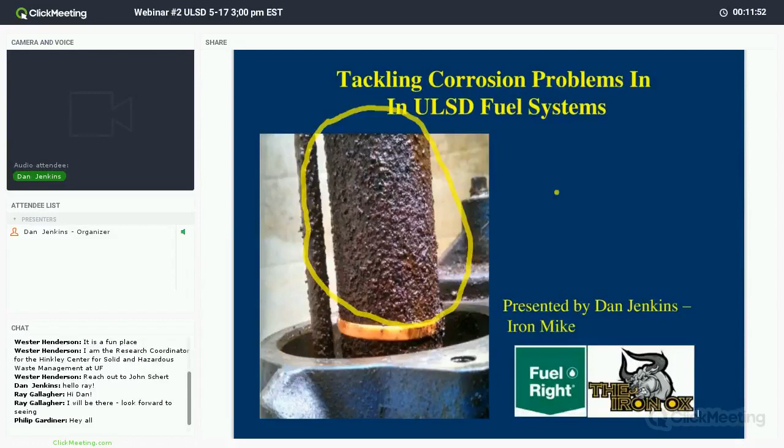My company is Iron Mike Global. We're representatives worldwide for Fuel Right and Iron Ox, and we are focused like a laser beam on solving nasty corrosion problems in hostile environments. In diesel tanks and in sumps, they're some of the nastiest known to man.

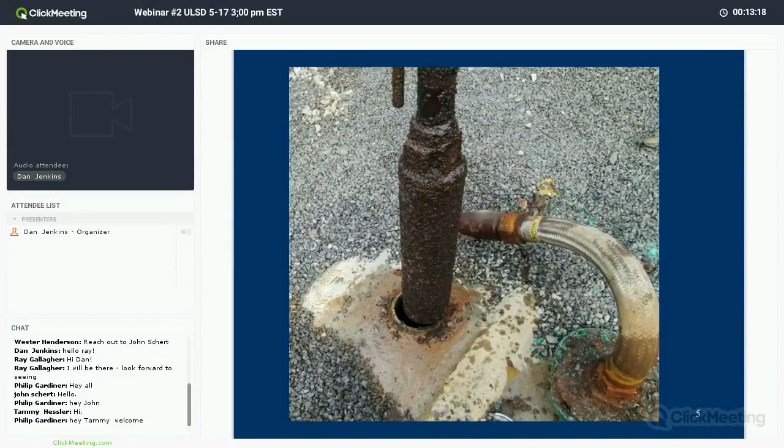There's some other corrosion, some indicators for you guys out there. If you see corrosion on your shear valves, on your piping, if you see this nasty black stuff in any of your filters, that's a sign. Corrosion is sure to be coming.

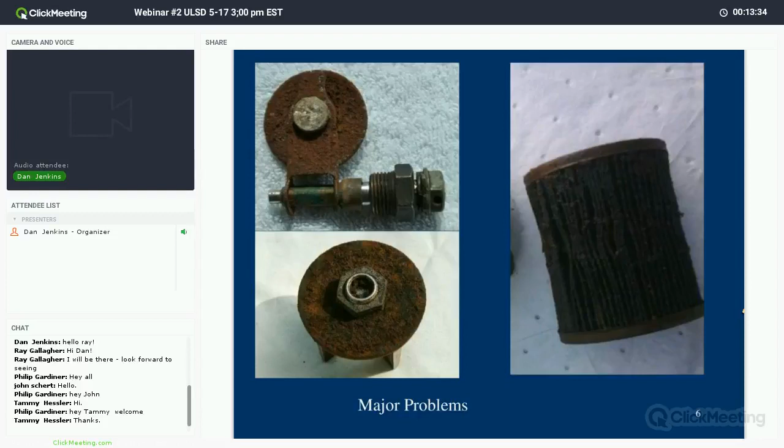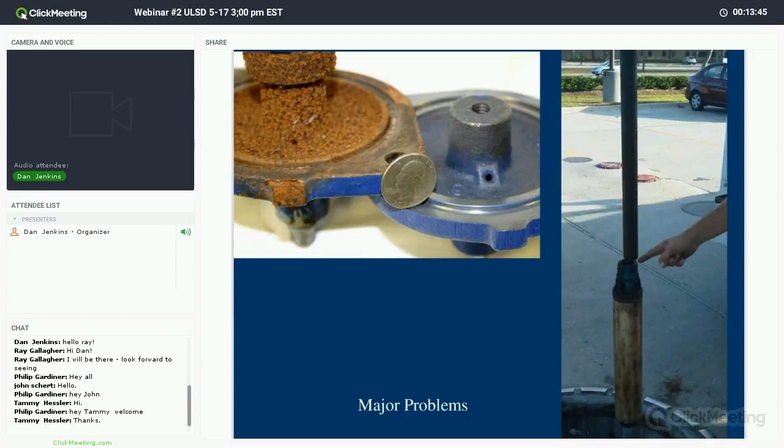Here's some other pictures. This is from Florida, and this is something that failed. It basically broke because of corrosion. We're going to talk a lot about that today, how to prevent premature equipment failure.

Some other signs, most of you don't stick your head in your tank. However, this is the bottom of a fuel tank, and it's got corrosion. You can see it right here.

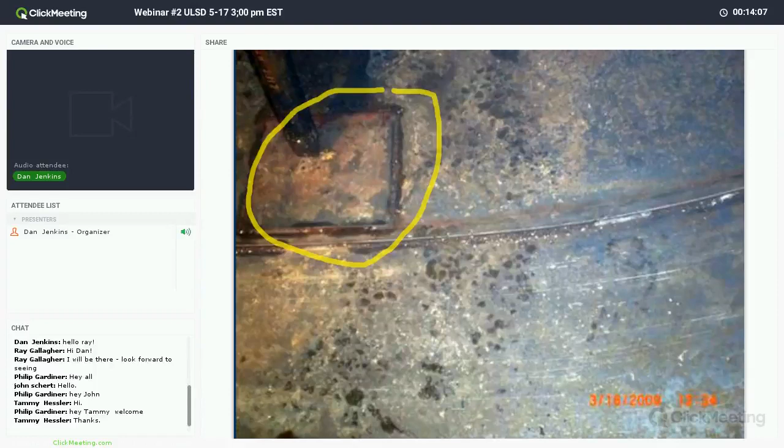Eventually it pits, or the wall thickness gets thinner from the outside or the inside, doesn't really matter. And eventually there's not enough steel there to hold the fuel, and pop, it leaks.

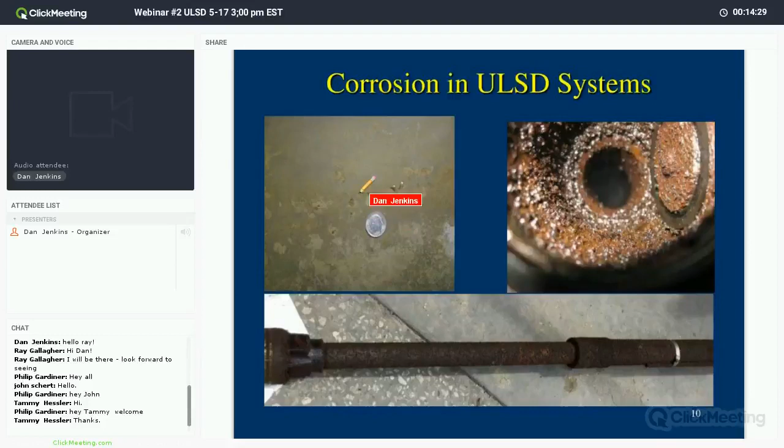We are getting deeper into the fill tubes, the drop tubes, and the spill buckets, and man, they got just as much corrosion as other places. You can see the corrosion. Here's the inside of a tank. See those little pits over there? Small pits turn into big pits, turn into big problems.

Again, the primary frustration for folks out there is, hey, this equipment ain't cheap, and it's supposed to last a long time, and now you got to replace your equipment.

Okay, not good. If you guys have trucks out there, I spent a lot of time at truck stops, and people complain a lot about slow pumps. So if you have slow diesel pumps, these truck drivers chatter, and they tell everybody on the radio, hey, don't stop at that place. So that's lost business.

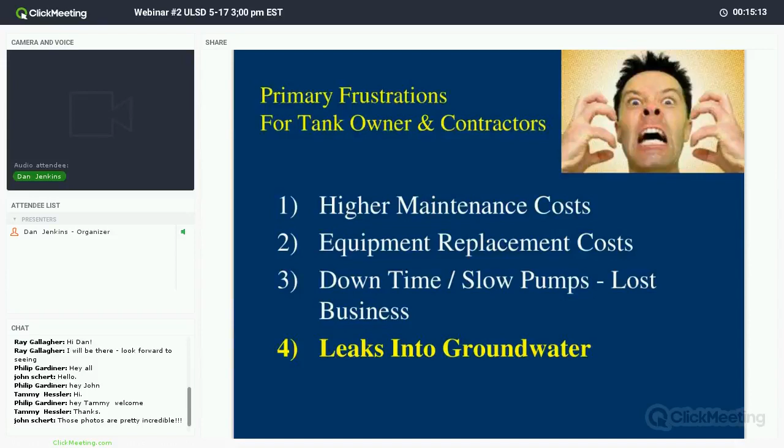And the big thing for me, I'm passionate about the environment, and leaks turn into groundwater problems, so we want to prevent that. So today we're going to talk about this corrosion.

Is it a ticking time bomb? I don't know, but I'm going to explore it with everybody today.

Or is it cosmetic? Some people just go to bed, roll over, and hope the problem goes away. Well, I can tell you, it ain't going away, it's just gaining on everybody, and now's the time to get ahead of the problem.

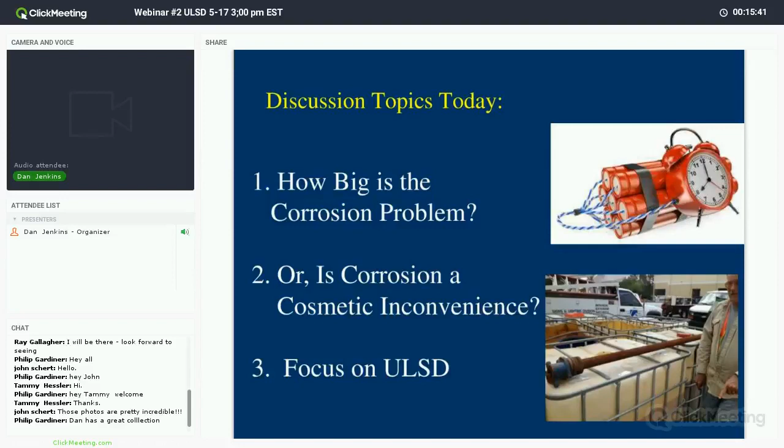So again, today we're going to focus on ULSD. Tomorrow we're going to do the sumps.

A little bit about me. I'm an educator and a trainer, mostly in the heavy equipment business. I spent a lot of time in the oil business on the upstream side, mostly with Shell, Halliburton, and Chevron, digging for oil, and mostly with cranes.

And I became an accident investigator, and I led teams of accident investigation. I went to a lot of clients and suggested to them how to prevent future accidents. And that led me to kind of running a school on accident prevention.

And I practiced a lot of preventative maintenance. I'm trying to take what I learned in the crane business and put it into the fuel business. My partner is also in the aircraft business, and he does a lot of preventative maintenance to make sure planes don't fall out of the sky. We put those two together, and it's a great combination to help people.

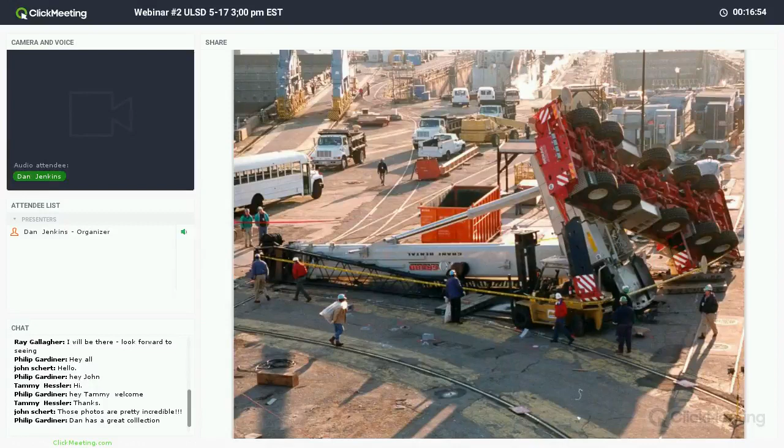So briefly, not to overload you on cranes, but these are typical crane accidents I went to. Why is that crane laying over? Same thing - why is that fuel tank leaking? There's reasons why the crane's laying over on its side, and there's reasons why the fuel tank's leaking, okay?

Sometimes cranes hurt, some people die, some people get knocked over, buildings get knocked off. As I went to these companies, I tried to suggest to them: if you don't want the problem to happen again, you may have to change your methods. Today there's a lot of old school methods in the fuel business that I don't particularly care for, and I think there are better ones out there. So we're going to explore those today, and how you can prevent an accident.

All right, so which leads me to how I got into the fuel business, which leads me to the great state of Louisiana, to a guy named Leo down in Houma who had lots of corrosion in his fuel tanks. He would always go back to the dealer and say, hey, what's wrong? Why am I getting so much corrosion?

The dealer would say, hey, you're not removing the water. This guy Leo said, I'm removing the water. And they would go back and forth. Leo would say, hey, you sold me a bad load of diesel. The dealer would say, hey, you're not taking care of your tank. It would just go back and forth, and they never bothered to change what they were doing, so the problems persisted.

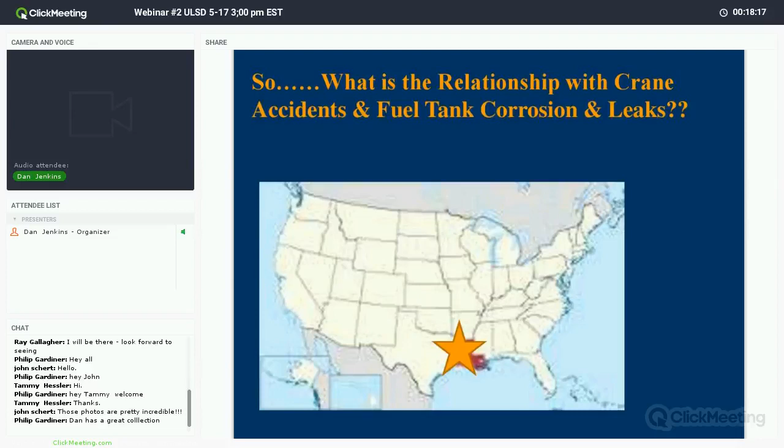And that's when kind of a light bulb went off in my head and said, hey, I could solve this problem - not me totally, but I could get involved in solving this problem. And we do. So let's talk a little bit about corrosion - how big of a problem is it?

Well, the EPA, led by a gentleman named Ryan Haerer - great guy, up in Washington - got the funds to do a study on fuel tanks around the country. He determined that 83% of all the diesel tanks in the United States have moderate or severe corrosion. I could send anybody that report if they'd like it. Great guy, Ryan Haerer, excellent department. I really like them, and they're doing their best to get ahead of this problem and head it off. If anybody wants his number, I'd be happy to give it to you. But he's the front man for the whole United States on preventing leaks. Great guy.

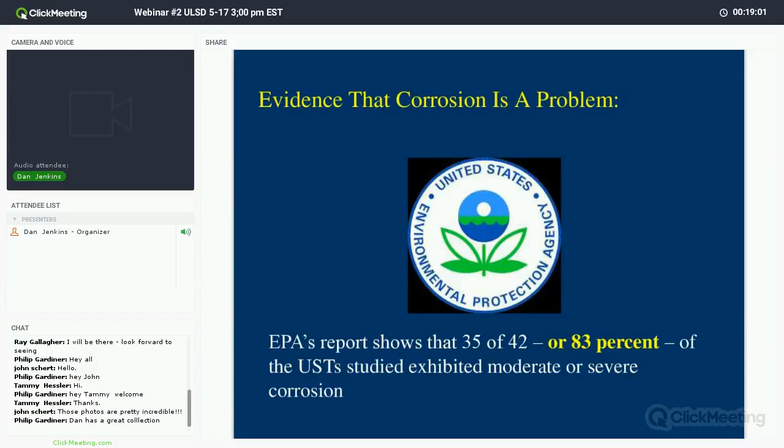Other things that are evidence there's a corrosion problem - there's an organization here called ASTSWMO, with two guys, Chuck Ray and Mahesh Albuquerque. They're collecting data from all over the United States on corrosion, and in the next couple months they're going to have a corrosion database of all the tanks with problems, so they can compare who's got what problem - how are we solving it, is it by refinery, is it geographic? Great people, and I'll be happy to give you that guy's name. If you have issues, you can go anonymous and share with this guy, because they want to help you. All 50 states belong to this organization, and they help with corrosion problems.

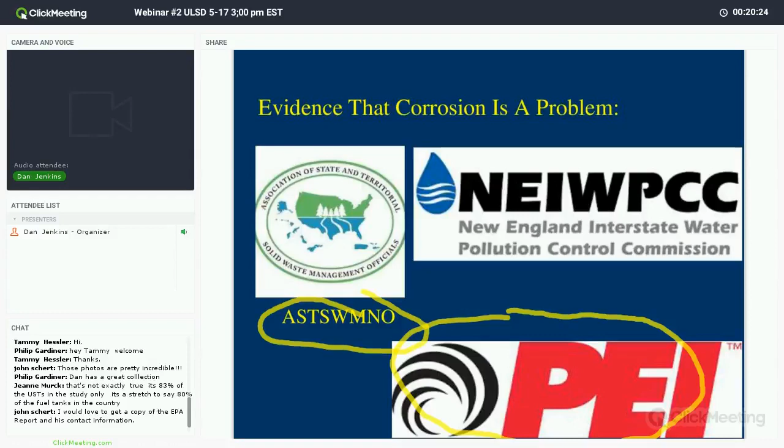Okay, cool - this organization, a great organization, they're getting into it, they have some subcommittees on it. A guy named Robert Renkes is putting together some manuals, some task forces. I don't agree with everything he says, but to give him credit, they are stepping up to the plate trying to get to the bottom of this. Contractors are seeing there's a problem out here - we need to get ahead of this so our customers have enough money to pay them. Good organization, good conference, and the guy's name is Robert Renkes. If you have suggestions, give them to him.

Great guy. Okay, this organization is amazing - they started a forum on leaking fuel tanks after a big storm, led by a guy named Tom Shrubin and Eric Dana. They meet six times a year to talk about fuel tank leaking and prevention. And I went to a couple meetings, okay, and guess what?

80 to 90 people showed up, everybody from the military to fuel tank dealers to truck rental companies, all interested in this corrosion. That's definitely evidence corrosion's a problem. And then the evidence, for me anyway, is the tank testers and the inspectors. Purport Engineering, Tanknology, Crompco, all the big boys, they're involved in this, and they share with me photographs and stories that say, hey Dan, there's a lot of corrosion out there, and it is a problem. So good for them, good people, they want to get ahead of the problem.

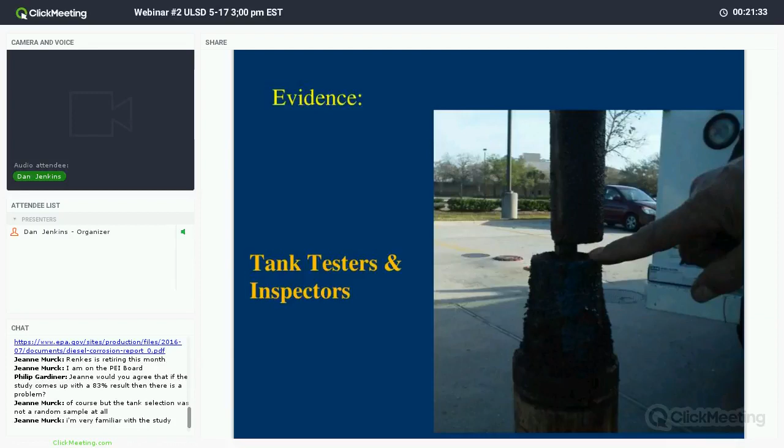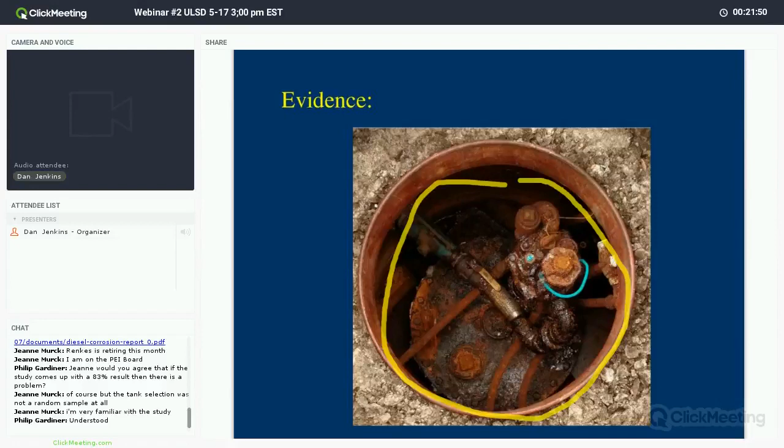The other evidence I have is the lovely sump. I spent a lot of my time in this world as well, and there's a direct correlation between corrosion in sumps and corrosion in diesel tanks.

So where does this happen? Everywhere in the United States. We do sumps all around the world, we do diesel tanks around the world, and it doesn't matter. I've been to California, Oregon, New York a lot, Florida, Texas - corrosion's everywhere. It doesn't matter if it's 10,000 feet in Utah or down in Miami where it's like living in the Amazon jungle. There is corrosion, okay? I've seen it with my own eyes, and we get reports, we have customers, so we know it's a problem anywhere.

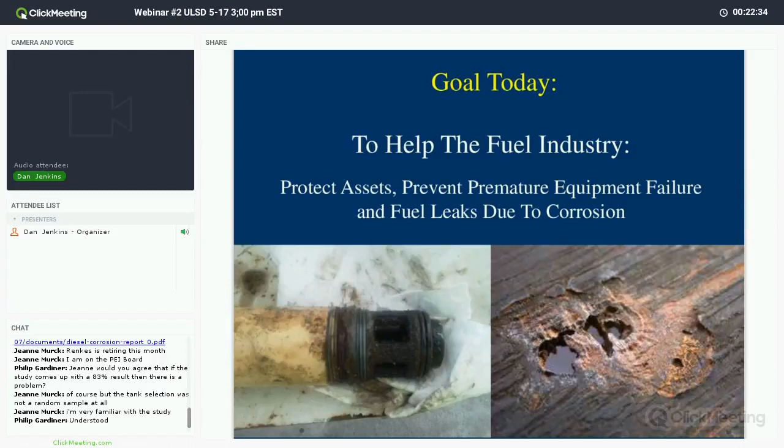So my goal today is to help everybody. I want to help you protect assets. I want to prevent equipment failure, and I really want to prevent a leak.

So how did we get here? If you read a lot of reports, there's about four factors that have got us here. Two big changes in laws: one is the Clean Air Act, and one is the Energy Independence Act, so we're not buying as much oil from the Middle East. The big cities - New York, San Francisco, Portland, Denver - really pushed for changes in clean air, and that resulted in changes in fuel. We introduced new chemistries for fuel, new ingredients, whether corn or switchgrass, doesn't really matter. The fuel has changed over the last 10 years.

That's an issue. The other issue is the metal has changed. I happen to work for a metallurgist who examines metal - he looks at grain patterns, he looks at contaminants in metal - and he says, hey Dan, this ain't your father's metal anymore. So the metal has changed. I could say the same for the poly side, the fiber side, the resin side - there's some differences, and what's in the fuel affects it. We'll get into that a little bit.

And I also think the majors pulling out - Chevron, Shell, Exxon, BP - they don't own as many sites as they did 20 years ago, so their engineers are not in this game that I can see. If they were, I would have met them at a conference and they would have talked to me about the corrosion, but I see them pulling out, and that's not a big asset if you ask me.

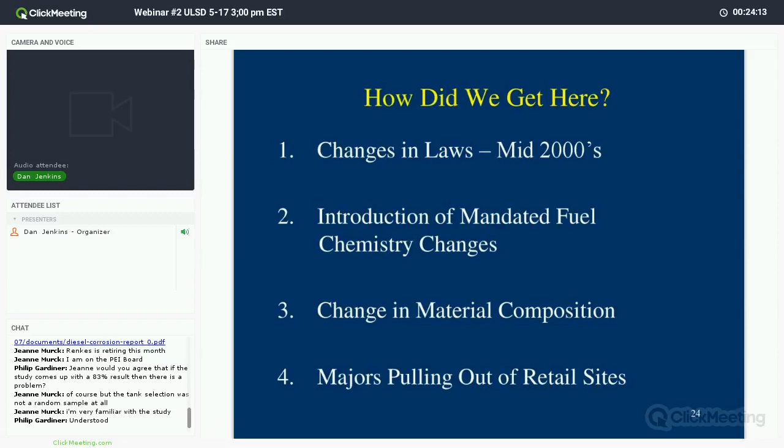Let's talk about steel. Where does it come from? It comes from the ground - it's mined, goes through a steel mill, goes through processing, and guess what? It wants to go back in the ground, so it oxidizes. We know that steel at one time was organic, went through this mill, and it wants to return back to its natural state, and therefore you get rust. So steel's an issue.

Let's talk a little bit about fuel. Where does it come from? It comes from the ground, right? It comes out of the bottom of the ocean - whether it's dead whales or dead animals or vegetables, it comes out of the ground. It is a complex mixture of lots of organics and hydrocarbons, an incredibly complex mixture. Because of that, it has lots of organic compounds. It's a food source, and guess what - it supports bacteria. Remember that. So all fuels, all water support some form of bacteria.

Thanks, Janine or Jeannie. And yes, tell Ryan Haerer I said hello. Nice guy, great, great person.

So we have this fuel - it's organic and it supports bacteria. Let's talk about this bug for just a minute. Everybody's heard about it. There's about 30 or 40 known strains of it, whether it's fungi, yeast, or mold - really doesn't matter to me. I've looked in a lot of sumps, I've seen a lot of weird stuff, I've looked at a lot of sludge in my life. There's a lot of weird stuff, and they're all a little different. These bugs come from the air, they come from the water, they come from dirt and debris. So somehow, some way, it's going to get in your tank.

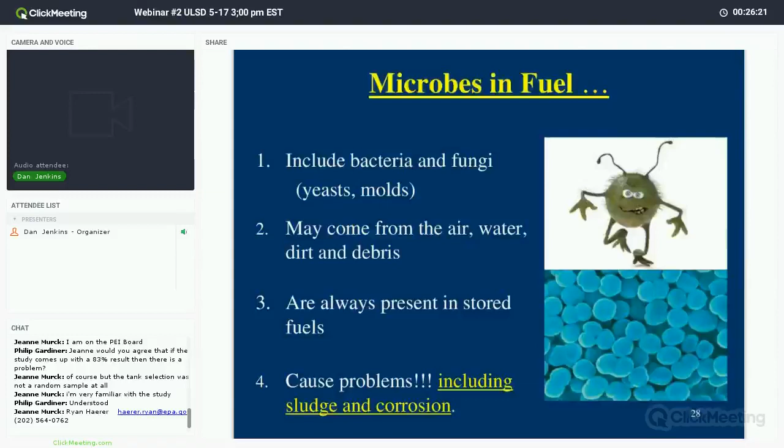A lot of people try and say, hey, I could stop these bugs from getting in my tank, I could stop these bugs from getting in my sump. They're too small, they're microscopic, you can't see them. If you filled up 10 skyscrapers and the Statue of Liberty with paper clips, the amount of bugs present would be about a handful of paper clips. So they're microscopic, please remember that. You can't see them. All the best pipe dope in the world, all the best filters, all the best seals ain't going to work because they're in the air and they're going to get in your system somehow, some way.

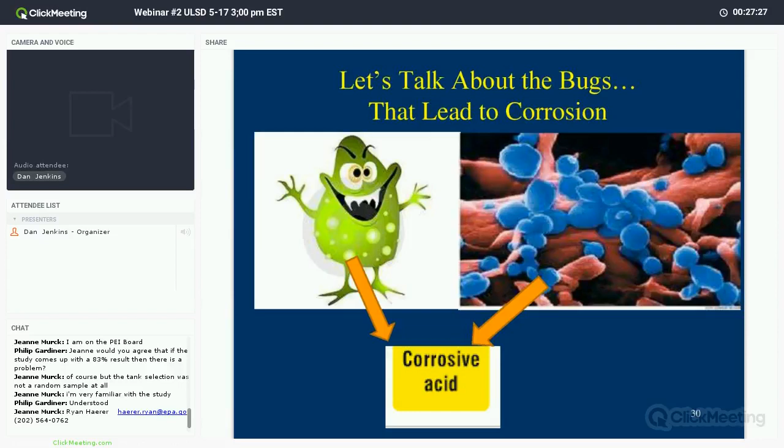So how do these bugs create acid? How do they create problems? Well, it's an organism, and it has a mouth, and it consumes food, fuel, and water. And the end result, it poops, or excrements as they say, some acid. There's some enzymes in there and other stuff, and it makes acid. Remember that word, acid and acid value come from the bugs, okay? And we have a way to control that acid.

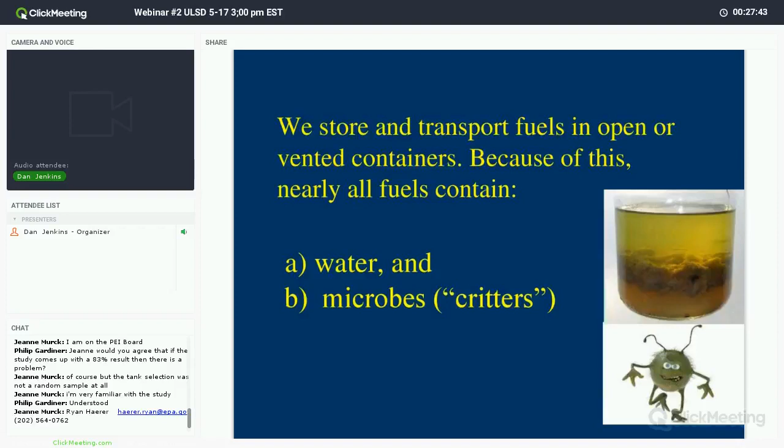So having said that, we have water and bugs in our fuel. All fuel contains it, and we can't stop it. Nobody can stop water from getting in the tank, nobody, okay, and we'll explain a little bit of that later. So because of that, your whole system can be contaminated, from the pipeline to the loading rack, okay?

And I'd like to take a minute and talk about this guy right here, the guy who delivers your fuel. I can't do a show of hands today, but how many of these guys do you think have absolutely pristine, residue, bacteria-free tanks? Okay, if anybody wants to chime in, please do. I've worked at some of the biggest tank washes in Florida, and I can assure you, these are disgusting, grotesque, full of crap tanks that come in to get cleaned, and they're just delivering fuel.

Now a lot of people want them sterile. It takes a long time, and it is very, very hard to get every piece of crap out of that tank, okay? So there is cross-contamination. There is water. They use this big sprinkler system with hot water and steam. And I'm telling you, I've been in them, it is very, very hard to get it all out. And most of the truck drivers I've seen don't want to get it all out because they don't want to pay for it.

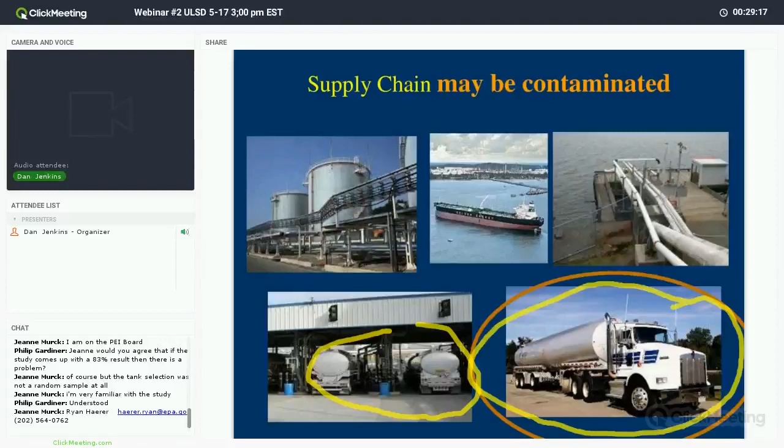So you're going to have some cross-contamination in your delivery system. I don't think there's anything we can do to avoid it. There's no laws against it, there's no way to test it. And it's very, very hard unless some federal inspector wants to stick their head in there and take random samples. It's going to be really hard, so it's going to happen. And it can happen to the best of them, the guys who keep it the cleanest could have the bug problem. So it's a problem.

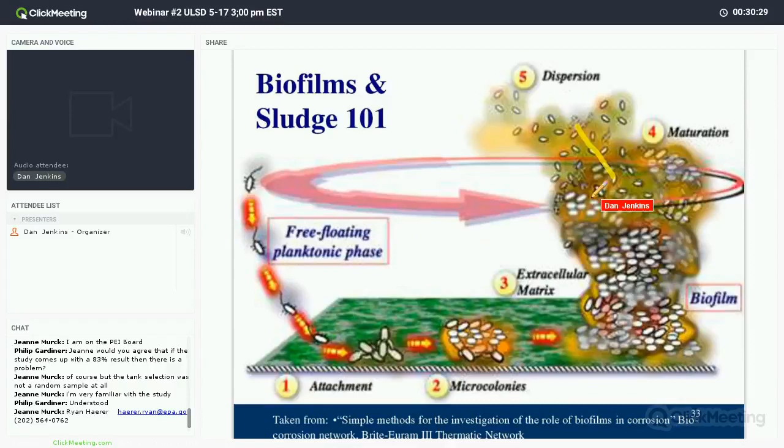There you go, there's a great picture of sludge. So if you have someone who says, hey Dan, hey Phil, hey Josh, I got me some sludge and I got me a plugged filter, that's a sign that you have problems to come.

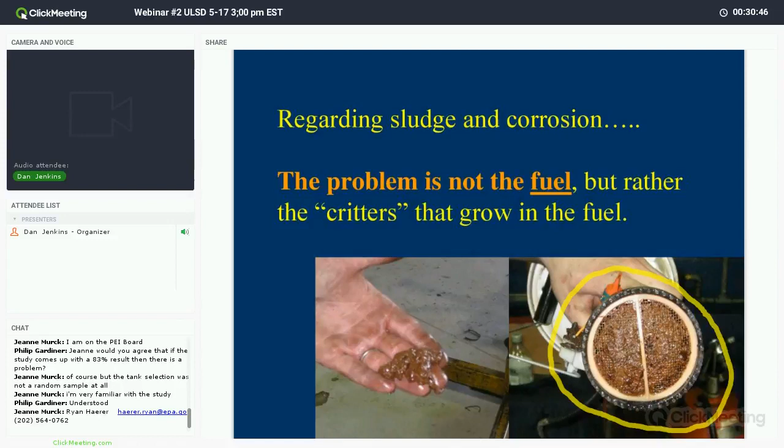Okay, so now we know a little bit about sludge. Let's talk about water. Again, you can't stop it. Impossible. We have water that's on the bottom of your tank, we have water that's dissolved in your tank, and we have this water that makes your fuel hazy. This is the problem. So you need to keep checking for hazy fuel, and I'll explain why that is.

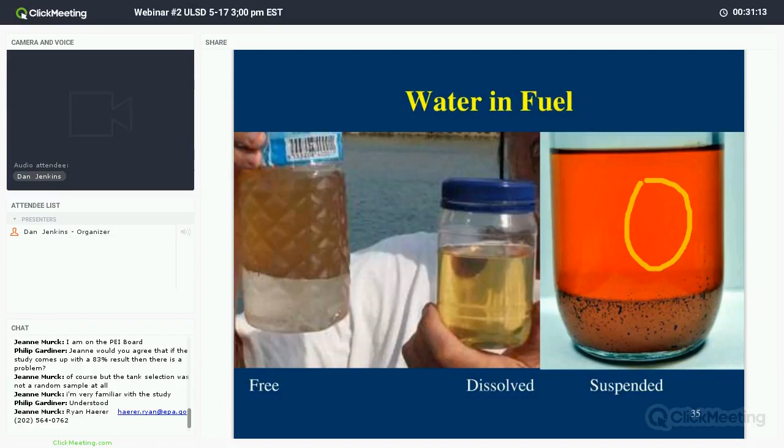The hazy fuel supports the bugs. They stick to the parts and they cause rust, and it is bad news. So you look at these risers, you look at these fill tubes, chances are there's sludge on there. It's stuck there, the water stuck to it. A lot of people describe it as coffee grinds, and it's bad news. So if you have hazy fuel like this guy, mostly bad news. And eventually you get the rust chips and they clog your filter.

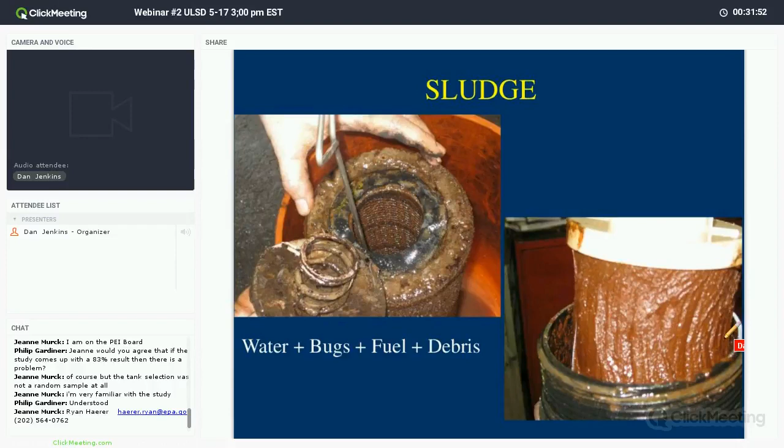Not good. Okay, let's talk about sludge just to review. It's water, it's bugs, it's fuel, it's debris, and it makes this nasty slime. Okay, keep your eyes out for the slime. And it can happen to the best of them.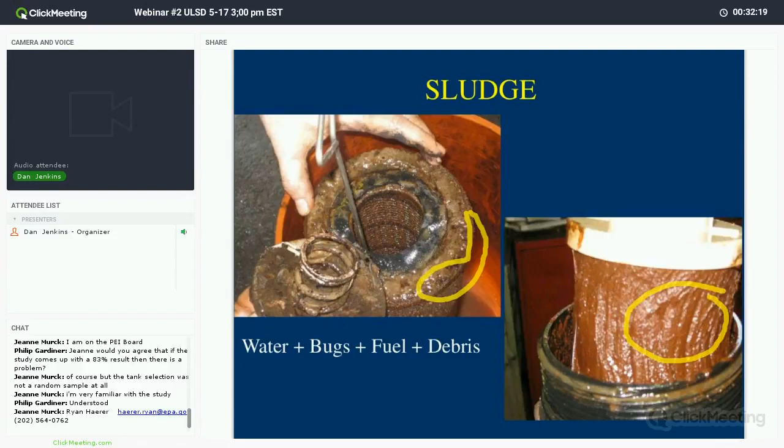The guys who do the offshore tugboats and the offshore transport boats, they keep their system pristine. They have these massive inboard filters. Even the best of them have outbreaks because the bug gets through, settles in the bottom of the tank, and it starts its life all over again. So, to review, if you have sludge, you're probably going to have corrosion. If you have these plugged filters, that's when you need to start paying attention.

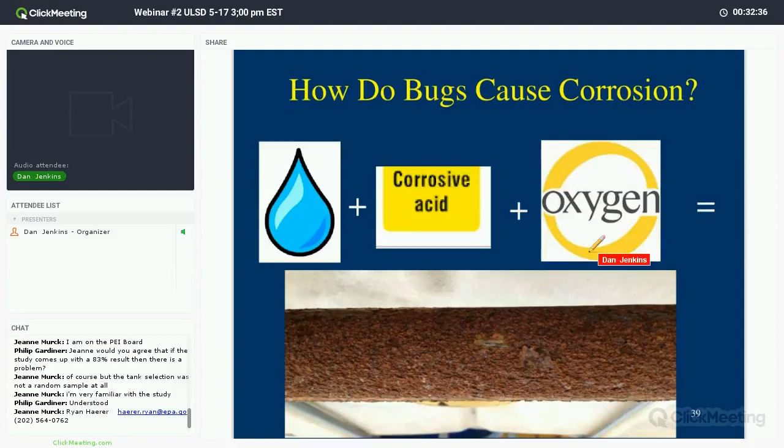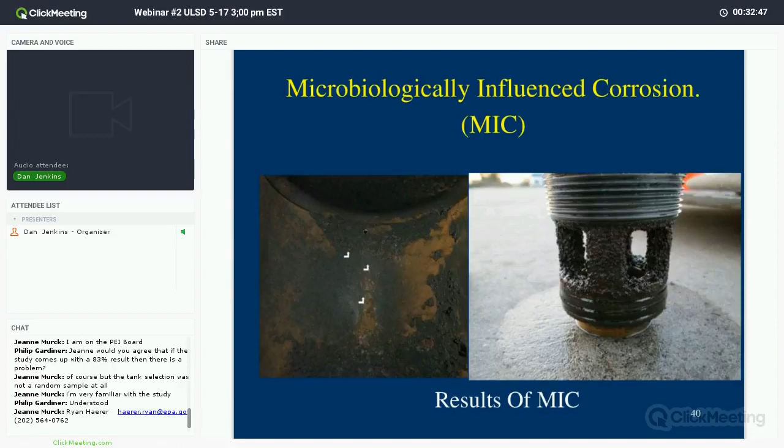And so you add up the water, the acid from the bugs, and the oxygen, and that's how you get corrosion. Some people term it MIC, microbial influenced corrosion. That's how it starts. If you need more information, let me know. I got to move on a little bit.

So people ask, hey Dan, how long does it take for corrosion? How long is it going to start? When am I going to expect it? How can I keep it away? Well, our chemist at Fieldright says about 18 months is how long something really turns nasty. But he could determine in 6 months if you have the start of a problem.

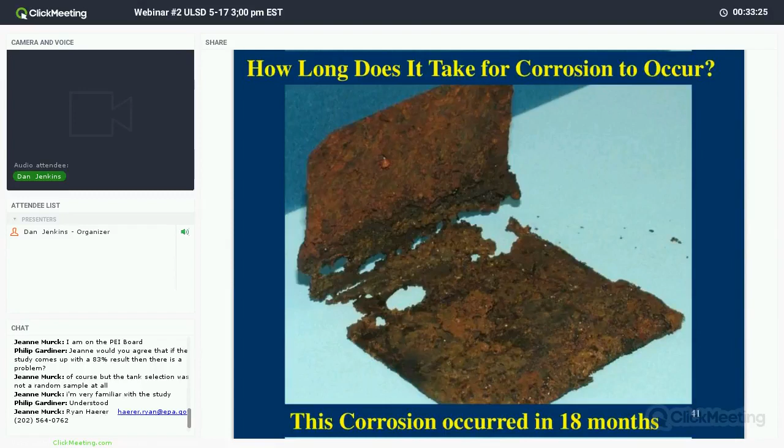So if you have a brand new tank, you could have an indicator as soon as 6 months, just so you know. And I could share with you after the webinar how you can tell if you're going to have a problem. So to review, if you have water, and you have sludge, and you have metal, you're going to have corrosion.

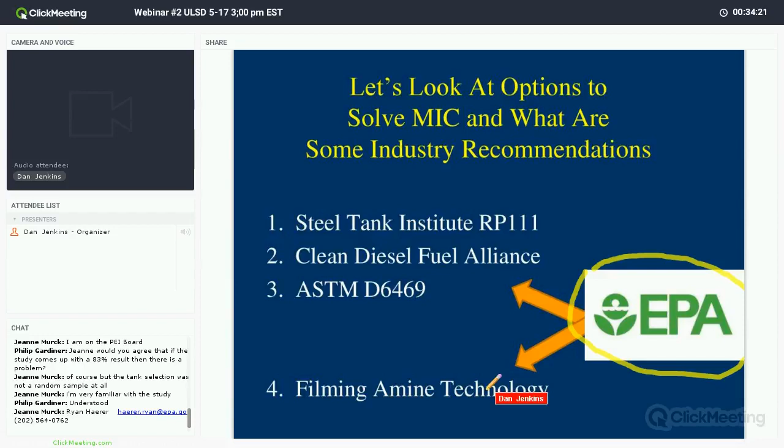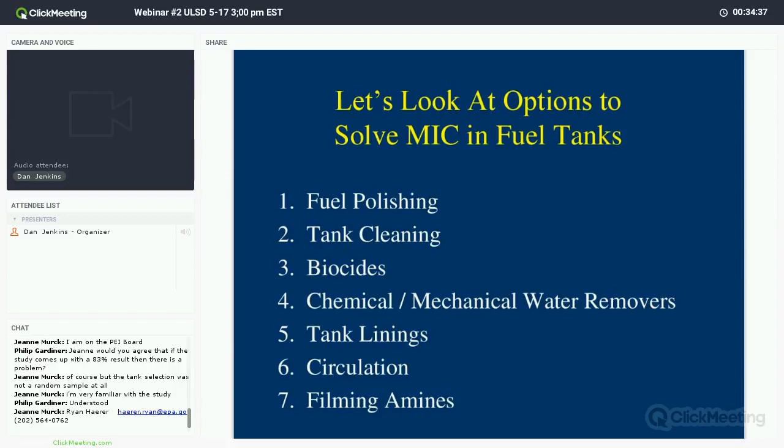But also, to their credit, the EPA does recognize ours now, called filming amine technology, which we're going to talk about shortly. And here's what they recommend: fuel polishing, tank cleaning, biocides, chemical water removers, tank linings, circulation, and the bottom one, filming amine. So I'm briefly going to go through these, and then I'm going to get to the filming amine.

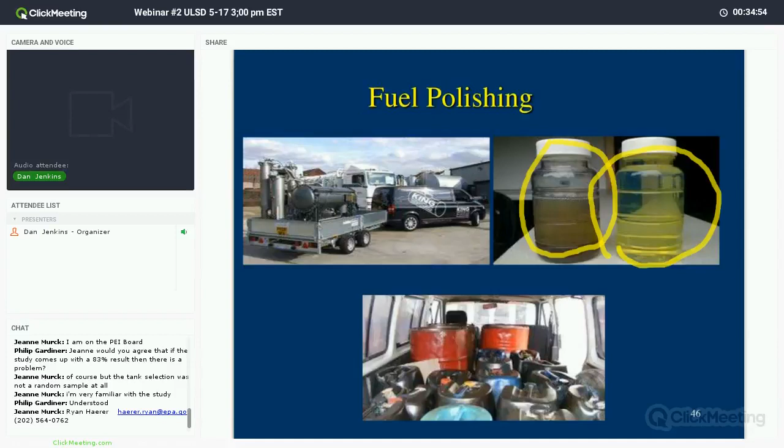First, fuel polishing. Been around, was actually invented in my backyard in Florida. Takes nasty fuel, runs it through these massive filters, and makes it look clean. To their credit, they can get your filters clean, and it does have other benefits. It does remove sludge. I like to give credit to a lot of filter guys, they're good, and it can remove some slime. But the big benefit is it gets the tanks clean now and gets you back up and running. So let's give credit where credit's due.

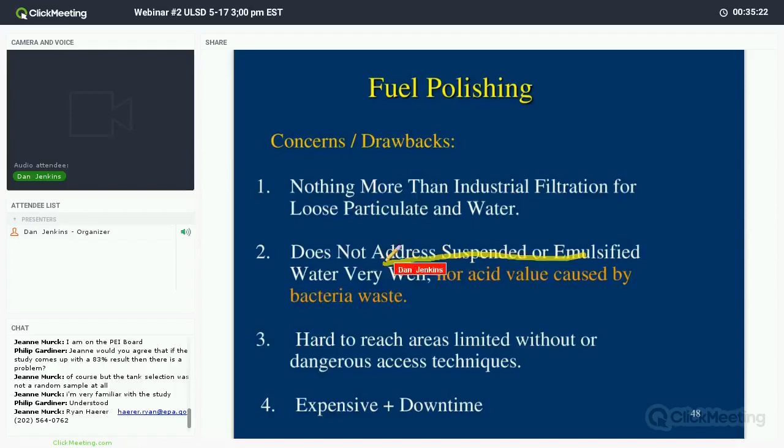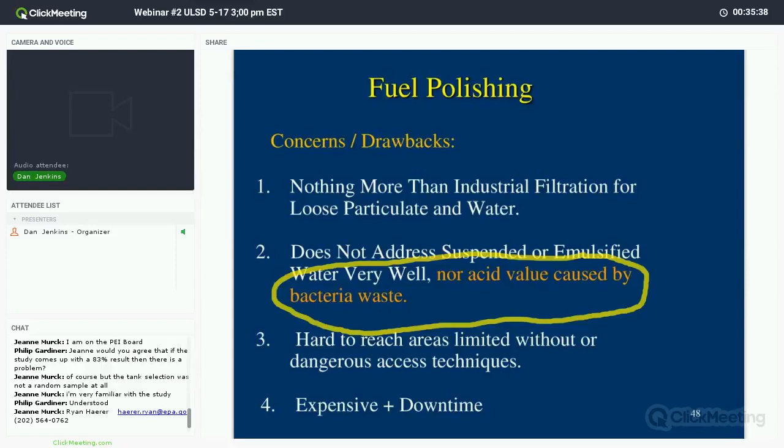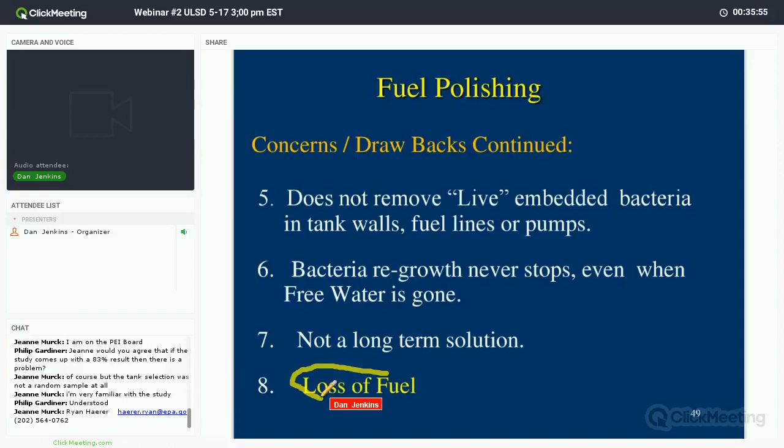The drawback is right here. Fuel polishing does not address the acidic value, and it does not get in hard to reach areas. And it's expensive. So I think fuel polishing does work, it just does not address corrosion very well. It's not a long-term solution, and these bugs are embedded in your tank, in your walls, in your equipment, and you're just not going to get them out with fuel polishing. And a lot of people complain that they lose fuel, 300, 400, 500 gallons at a time.

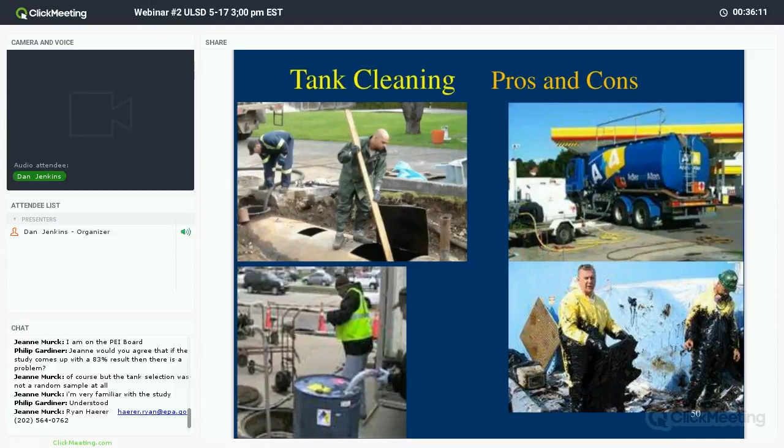So please pay attention to that. Same with tank cleaning. Sounds great in theory. You get the guy, you got him under duress, he's got problems in his tanks, send out the tank cleaner. Dirty business. Sometimes you got to cut a hole in it. Okay, it's messy, it blocks up the lanes. Very, very hard to do very well. Okay, a lot of nooks and crannies in there. It's hard to just stick a sprinkler system and a vacuum down there and think they're going to get everything out.

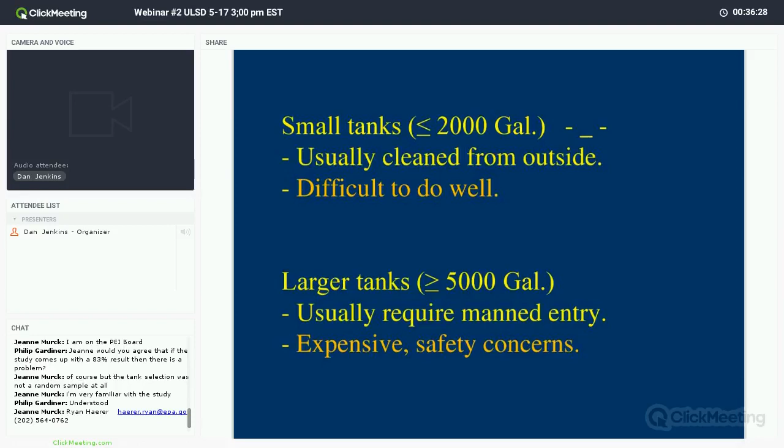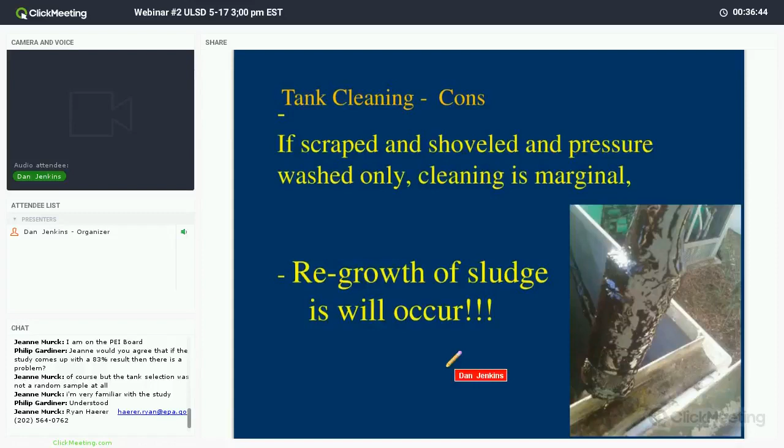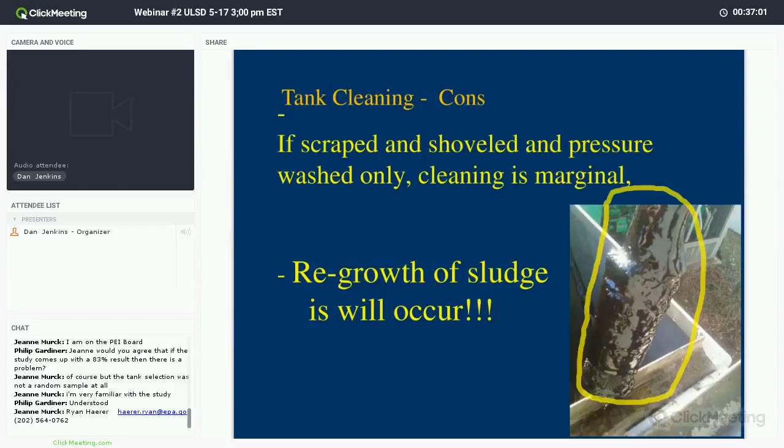So it's difficult. And if we go into man tanks, big ones, 10, 12,000 gallon tanks, it requires man entry. I'm a safety guy. I do not like man entry at all. Okay, and even if they shovel it, pressure wash it, steam clean it, guess what? The bacteria is still there, and you're going to get some sludge. Check out this sludge, guys. This is 6 months after tank cleaning in Daytona, Florida. Okay, the sludge comes back. So you have to be conscious of that, of tank cleaning. Good to do it once in a while, but it's not going to solve your corrosion problems.

And I'm really against sandblasting. I'm a metal guy, I'm a corrosion guy, and I hate sandblasting. Okay, I do not like removing metal and reducing wall thickness. It destructs the tank, and so I encourage you not to do it. Dangerous, and it's really, really hard to get it all out. And sometimes you're just pushing it into the steel. Okay, so to review, fuel polishing, tank cleaning, they do a good job, get you up and running. The bad part of it is you got some hazardous waste, and it does not address corrosion very well.

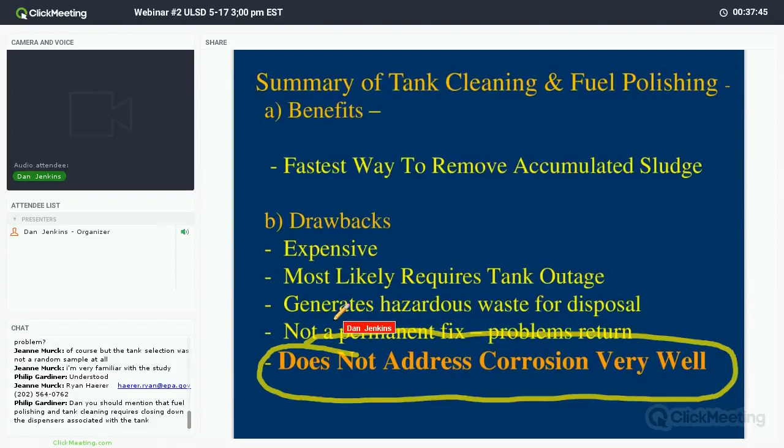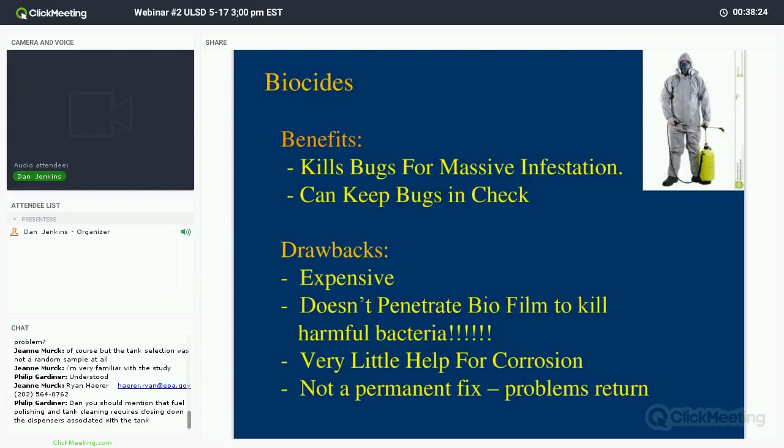Okay, let's talk about this other stuff. Biocides. Popular, okay, great marketing, great hook, kills the bugs, but guys, girls, it is impossible to kill all the bugs. It has its purpose. If you have a massive infestation, send out the biocide, the bug guy. It's actually a pesticide, a rodenticide, and it's got a lot of good name recognition. I'll give them credit, but it doesn't address corrosion. And I'm going to tell you why. So great marketing. I'm not a big fan of it unless you have a massive infestation. And it's very, very hard to get 100% kill.

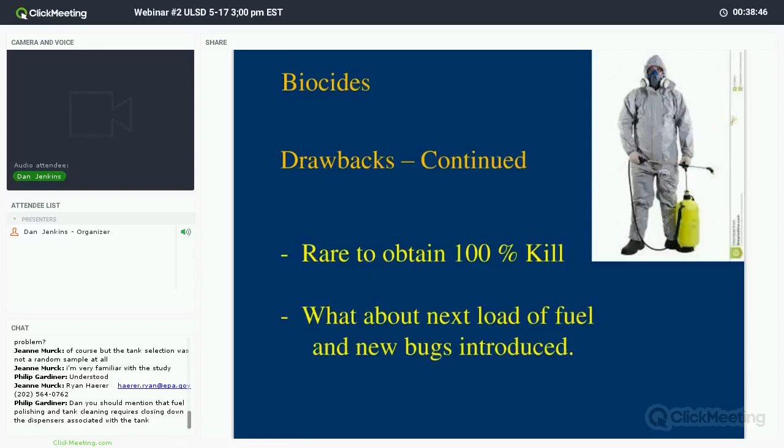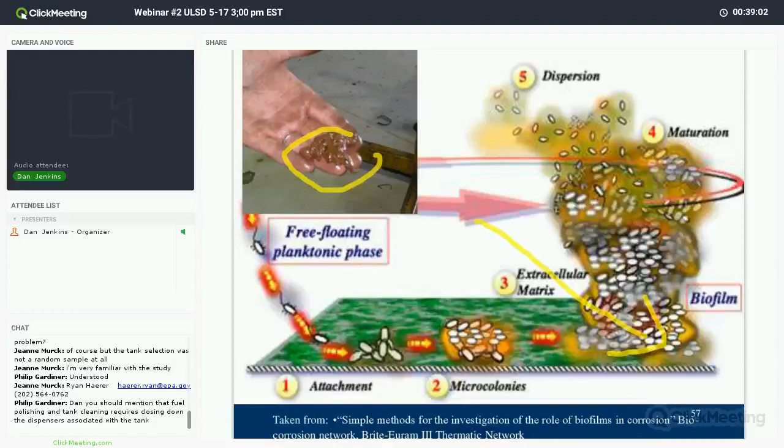And the problem with the biocide is, for those of you who are getting lots of loads of fuel and lots of throughput, you're always going to be introducing new bugs. So therefore, you're going to have to add in more biocides. Not a good formula. So let's look at it again. There's the sludge. Here's the sludge. The biocides will not get into the sludge to kill the bacteria. That's its main problem, despite all the marketing hype. So there's my review. If you want to send a pesticide guy out, I would do it maybe once a year if you have to.

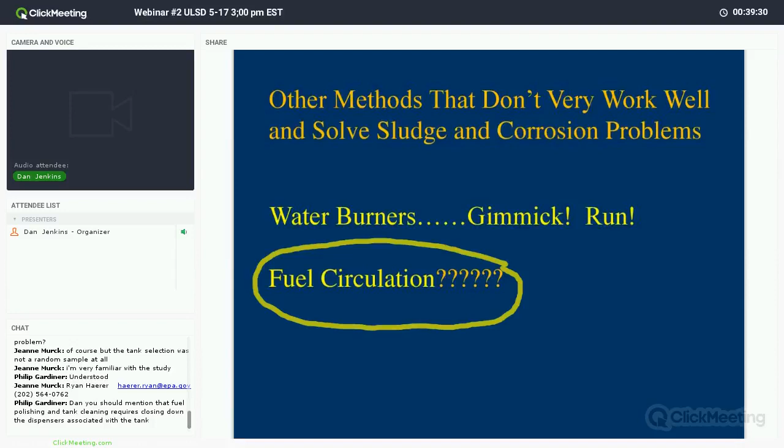Here's one other thing that's recommended, and I am buying steak dinners if anybody could tell me how fuel circulation will solve corrosion problems. I think it's a gimmick. I don't like it, and I see no place for it. But people want to do it, fine. But you're not going to solve your corrosion problems.

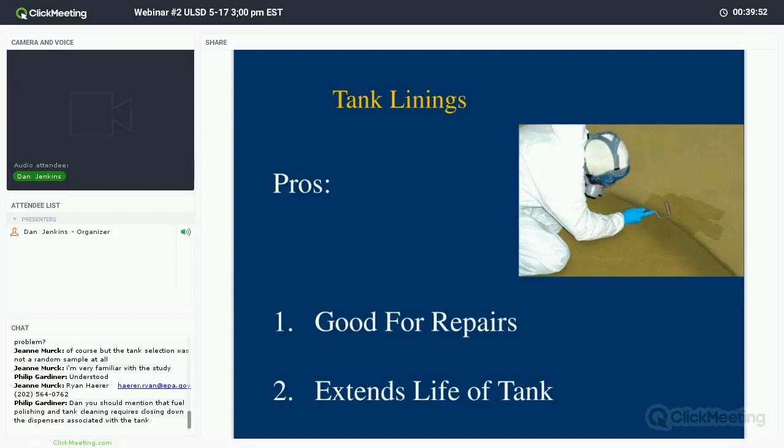Okay, here's one other thing I want people to pay attention to, this tank lining. Popular, okay? However, let's give credit where credit's due. If you have problems and you need repairs, you can't replace the tank, it is a good tool for repairs and extends tank life. So it does have its place in this equation. The problem is many. Okay, you got humans entering a tank. Not a good thing.

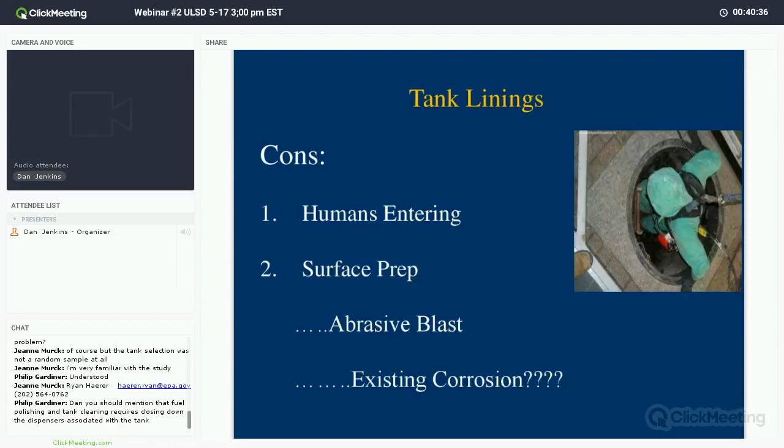And I tell you, I'm a surface prep guy, and it's really, really hard to remove the rust. And I will argue with anybody that when you sandblast and abrasive blast, you're not removing all the rust. In fact, you're pushing a lot of rust into the steel, and you're just not going to be able to see it. So to the human eye, it looks like they got rid of all the rust, but in reality, they don't. And it's very hard to treat the existing corrosion. And that's why you hear a lot of stories about lining failures, because they cannot address the corrosion. You just can't smother up the corrosion.

And if you do the tank linings, which is okay, if you need the repairs, you're going to have time and budget for inspections. Okay, and you may have to cut a hole in your tank. Not good. I don't recommend cutting any hole in any fuel tank. Okay, and I don't think there's any engineer out there who would want a hole cut in their tank.

And to these steel tank manufacturers' credit, okay, they are stepping up to the plate, and a couple of them are now going to make access points for people to inspect the tanks and get in there and do tank cleaning versus cutting a hole in it. So I want to congratulate some of the steel tank manufacturers out there who are stepping up to the plate and saying, hey, we got a problem, we're going to help people out.

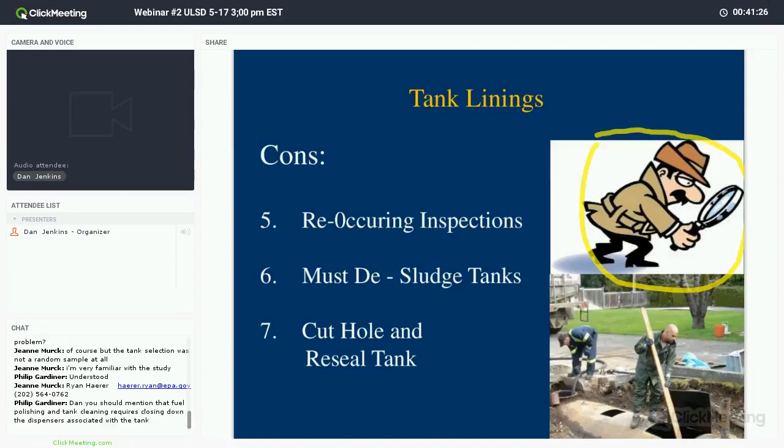Anybody got a question? Fire away in that sludge thing. Okay. Excuse me. Fire away in the chat room.

Okay. So how do we solve this corrosion problem? How do we solve it in diesel tanks? Well, I thought you'd never ask. So here we go. I represent FuelRight, and we use what's called dual filming amine technology. Invented by a guy who had 28 years at DuPont, senior corrosion engineer who went around the world solving corrosion problems. And he realized this bug is really, really resilient, and it's a survivor. It's hard to get out.

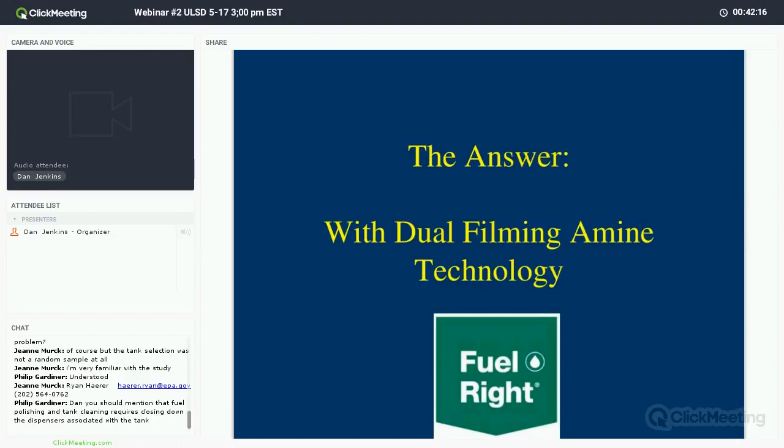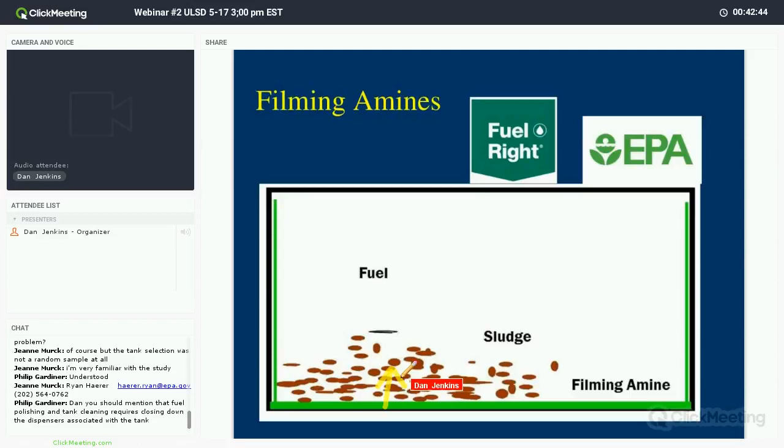Okay? And the beauty of it is this. Eventually, the sludge is put into small particles, and they get smaller and smaller, and they go up through your pickup tube with your water, by the way, in micro emulsion, and they pass right through your filter and right out the back of your engine. It's a really cool way to solve this problem. I got videos of it, I got testimonials, we got testing.

So again, the sludge is still there. We just break it up into a gazillion little pieces and drag a bunch of small particles of water through your filter and out the back of someone's engine harmlessly. So that is the crux of filming amines. Again, it's microscopic. You can't see it. You just pour it in the tank. It coats the surfaces of the tank, and it works. And it addresses the sludge.

And also, this coating does not allow new sludge to grow. So nothing's going to be able to stick to it, okay? It stops the existing corrosion. The corrosion's still there. It just stops the new corrosion from forming. So we address sludge and corrosion at the same time, okay? So that's cool. Again, it's hard to explain in 15 minutes, but I got some videos on it, and I'd be happy to send it to you.

Yes, we have papers. I have documentation. We actually test through Brookhaven National Lab, Battelle Labs. So it's a unique way to solve this problem. It's different than biocides, completely different from biocides, because we don't kill anything and we don't try and kill anything.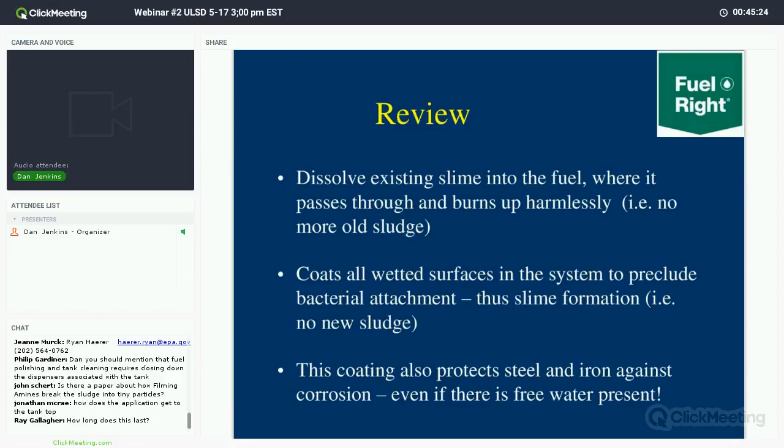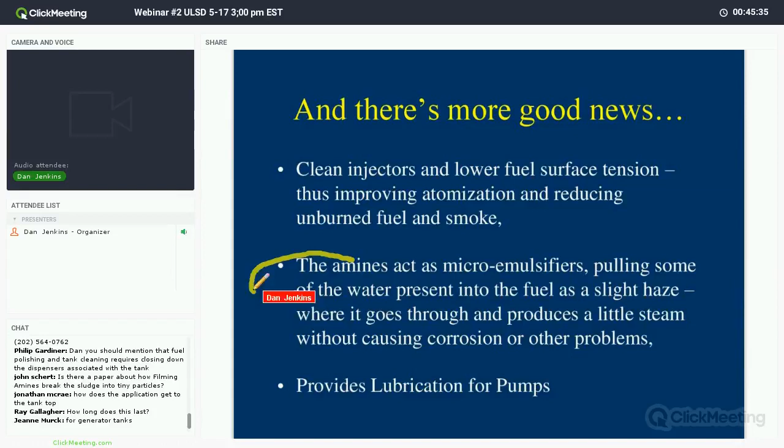Okay, so again, we dissolve the slime, coat the wetted surfaces, and we protect the steel. Even if there's water in the tank, we protect the steel. And again, you can't stop the water. The other thing is it has a little lubricity in it. It has some cleaning agents in there. And this is important. It pulls some of that water through your system in really, really, really small bubbles, and it blows out the back of the engine with no harm whatsoever.

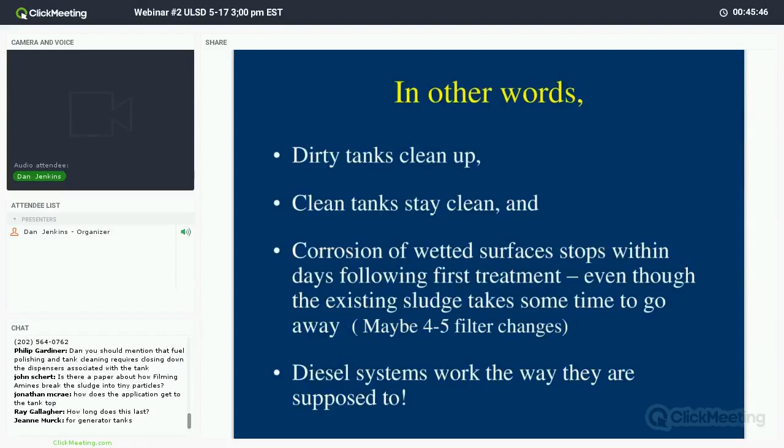Okay, so let's get on with it. So people want to know about FuelRight. They want to know about filming amines. Hopefully I explained it to you. And for generator tanks, someone asked a question on generator tanks. If the tank is dirty, I would say 2 or 3 times in the first quarter, and then back off to once a quarter. Okay, works in generator tanks. A lot of tugboats use it. Ferries. People with corrosion problems, and people who hate paying for tank cleaning are the people that use it, basically.

It's easy. There's no mixing. It's kind of economical. It's got a really high dilution rate, and it's easy to measure success. And I'm going to show you why.

So there's a nasty filter, and if you use Fuel Right, you get a nice clean filter. I recommend people use it to prevent it and not let it get to this way. But unfortunately, society, I think there's not too many people that practice preventative maintenance in the fuel business from day one. Not too many.

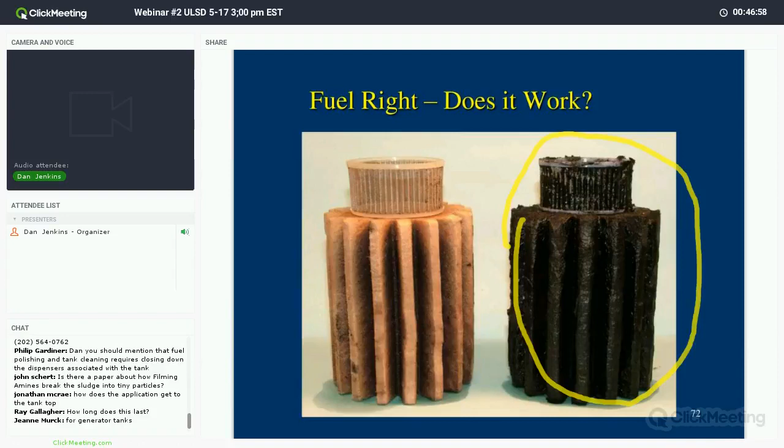Okay, so a little bit more about Fuel Right. I'm happy to send anybody the Virginia DOT study. We do a lot of business with the Florida Turnpike. It's an emergency road. They have to stay open 24/7 during hurricanes. They cannot afford to be down. We have some big Caterpillar dealers who have massive sludge and corrosion problems, who even own fuel polishing and tank cleaning equipment, use our stuff. We're all over the world. And again, I have lots of corrosion testing that I could show people.

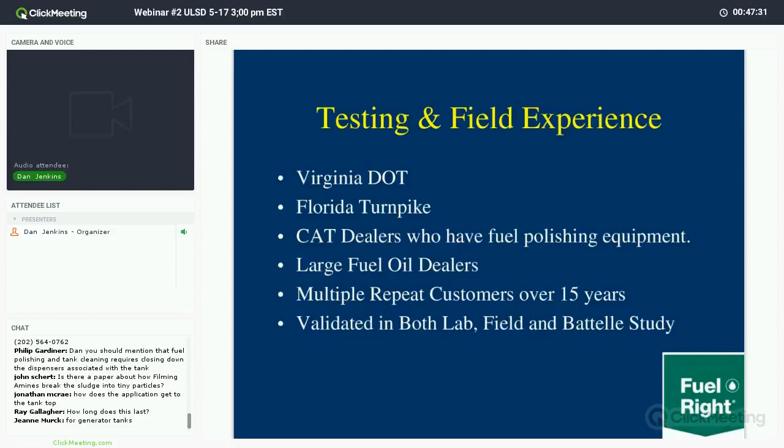Okay, so how do we start? You basically have 4 things you got to do.

Jeanne, are you concerned about emergency generators? Absolutely, particularly in the hospital, particularly in data centers. It's a problem, and I'll walk you through this exercise and tell you what we could do with emergency generators. It really doesn't matter, Jeanne, if the fuel is turned over or it's not turned over. It is a myth that people say, oh, the more fuel I get, the less problems I have. I don't believe it. The more fuel you have, the more turnover of fuel you have, the more water you introduce, and the more bugs you introduce, and the more air you introduce. That's a recipe for disaster.

So it doesn't matter if the tank is idle or busy. You're going to get the bugs, and you're going to get the water. So how do you start? You got to tell us how big your tank is, how much fuel you keep in your tank, and how often you fill your tank. So busy stations, some truck stops get 2-3 deliveries a day. And we'll talk a little bit about cold flow. If you're in a frozen tundra somewhere, that's a subject for a separate date. Just send us the information - how cold is it, and how long does it stay cold, and we can address it.

Okay, we got a question. It says they don't have much - yes, and yes, Jonathan, a lot of generators are behind the times. And I can take a minute here to say, I respectfully, everything I say is with respect, I don't think you're going to fuel polish and filter your way out of a corrosion problem. I know these big hospital chains get these big orders and load up on filters and filtration and automatic this, automatic that, and filter. But basically they're just filtering the problem away. They're really not addressing the core issue. So it's good for some contractors, not good for the hospital. So there's my 2 cents on hospital generators.

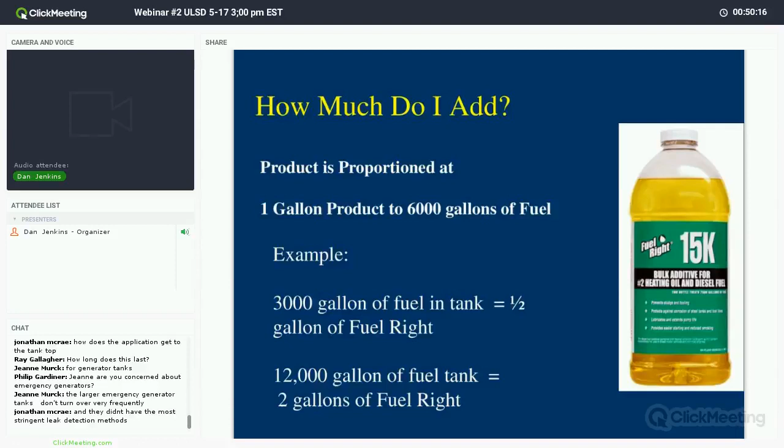If you have a nasty tank and you don't want to pay for fuel tank cleaning, you may have to, depending on how nasty it is. But if you add Fuel Right, you are going to be releasing that sludge, and you will be changing filters because you are releasing a lot of sludge. And as most people know who are on this webinar, there's a lot of sludge out there. It might take 3 months, might take 2 months, might take 5 months - don't know, every sludge is a little different, every tank's a little different. But once those filters start cleaning up, you could back off to once a quarter.

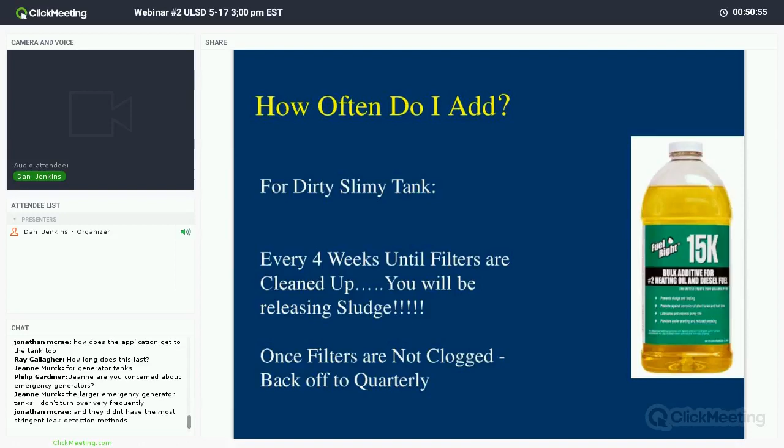And I'm going to jump right here. Okay, I'd like everybody to pay attention to this device right here. It's $75. It's the best investment you'll ever buy, because it's basically a can opener for your filters.

If you want to know if you got a problem, every time the guy changes a filter, cut it open, and get yourself a $5 magnet. Put that magnet in there, and if you got rust chips, you got yourself a problem. You got sludge, you got stuff, and that is the best way. I know there's a lot of test kits out there. Some of my clients use test kits, power to them, but I love the filter cut opener. It's by Longacre, $75. Order it from Amazon, comes in a week, and cut your filter open.

I am an accident prevention guy. Spent most of my career preventing cranes from falling over. I inspected a lot of cranes, I led teams of inspectors, we inspected cranes. A lot of people do not inspect their filter. So if I could tell you any good thing, inspect your filter. Get a magnet and test it for corrosion. That is the easiest, best test you'll ever do.

How does it get to the top of the tank into the risers? Great question. I don't have the diagram in front of me, but the ullage space is a challenge. There's no question about it, the ullage space is a challenge. So what you have to do is, Fuel Right only works on wetted spots. I have that in one of my slides. Hang on, sir, here we go.

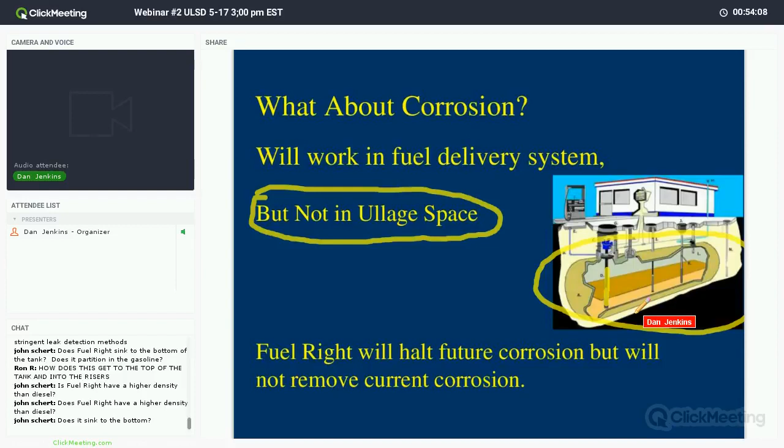Keep asking the questions. Does it sink to the bottom? Yes. Fuel Right, let's go back here, back a little bit. Fuel Right attaches to all the surfaces in the tank. It attaches to the piping, it attaches to the piping in the dispenser. It is a fuel system treatment. So this filming amine again, it's microscopic, you can't see it, just like you can't see the bacteria. It attaches to all the metal surfaces, okay?

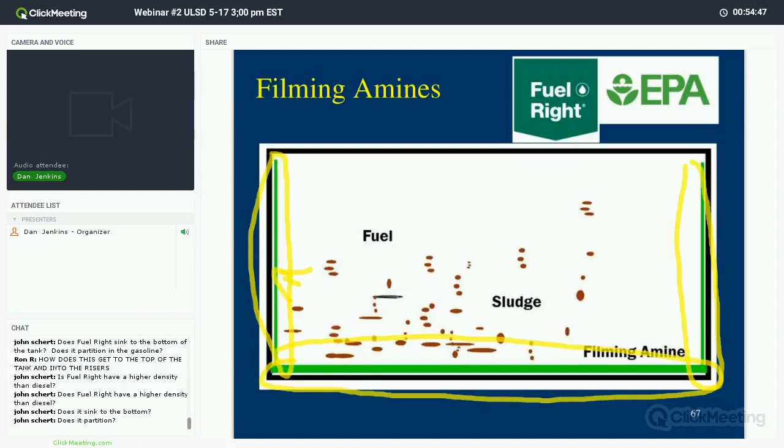And it's good in poly tanks. It won't do any corrosion protection in the poly tanks, but it will certainly help you break up sludge in your poly tanks. And the poly tanks have their issues too, the resin tanks have their issues too. Someone just sent me a bunch of pictures of delamination in tanks, and that's kind of a subject for another day.

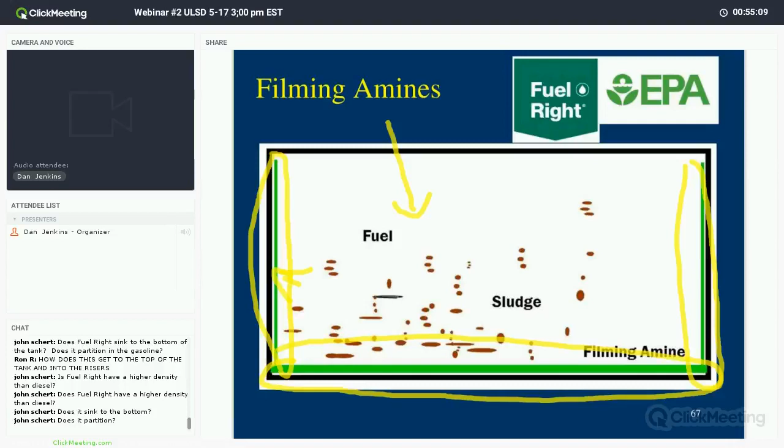Does it partition? Yes, it does, it gets all the nooks and crannies. When it's added to the tank, it's self-dispersing, there's no agitation. It's actually alive. If I could show it to you, where is it? So when you get this bottle, it's actually alive. It's not bubbling, but it's ready to do its business. So it's going to go out and find the corrosion in your tanks, okay?

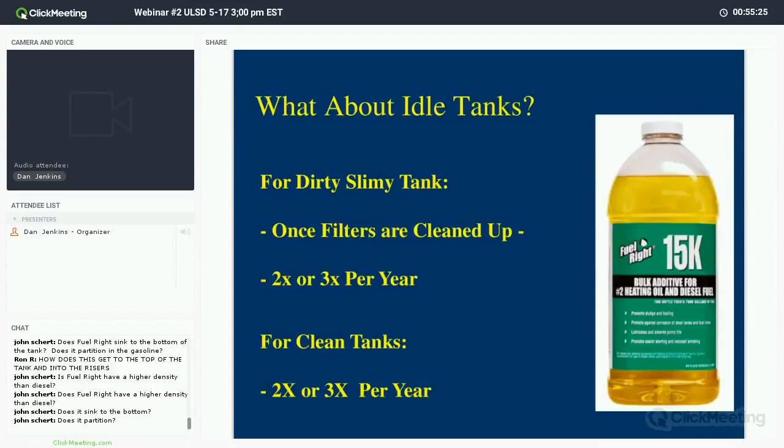And it's going to address them. So we got a few more minutes here. Again, I recommend this filter cutter, okay? I recommend Fuel Right as well. If you have cold flow issues, just send us the temperature and we're happy to help you out. Slightly different subject, depends on how much flow you have and exposed piping and so forth, just send it to me at the Iron Ox. I just want to give people an overview today that we have some technology that's proven, that works, that addresses this nasty corrosion without biocides, limited tank cleaning, reduced filter changes, and it's unique, it's different, and it is geared towards this microbial influenced corrosion, which is a tough problem.

Okay, couple questions, so I'm going to be closing up there. If any of your questions, fire away. How do you formulate Fuel Right? Fuel Right is formulated in Wilmington, Delaware, and it's overseen by a professional engineer named Bob Tatnall, a NACE corrosion engineer.

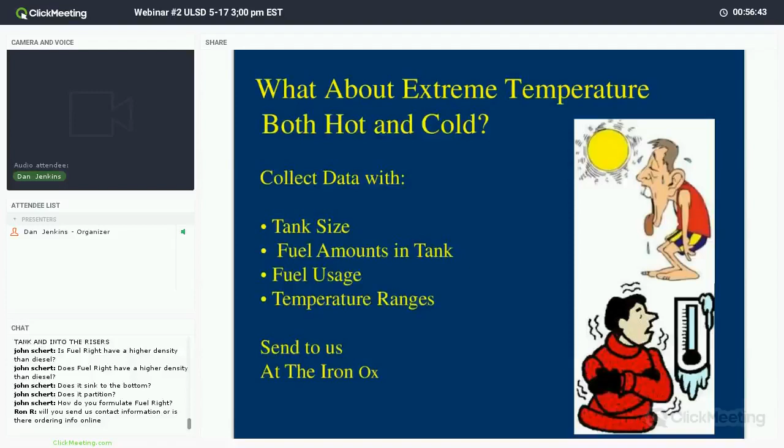Don't forget, tomorrow we're going to be talking about sumps, and that has its own specific problems. I just wanted to give you an overview. I'm going to send this out to people, and if anybody's interested in documentation, engineering testing, engine testing, we are about solving the corrosion problem.